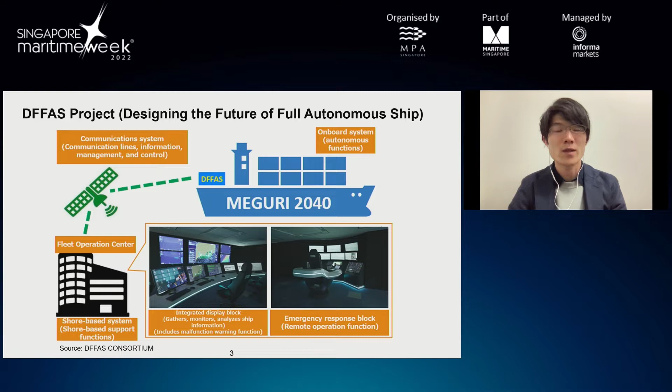This research conducted throughout the DFFAS project mainly has two objectives. First, to apply MBSE to autonomous navigation system development. Model-based systems engineering, MBSE, can consider overall requirements and functions based on the purpose and goal of the system and provide a common understanding of the system with multiple stakeholders. At the first stage of MBSE, the concept of operations, so-called CONOPS, is used to communicate overall system characteristics to the stakeholders. In this research, a reference model of CONOPS for a crewless autonomous navigation system is concretized using the DFFAS system as an example.

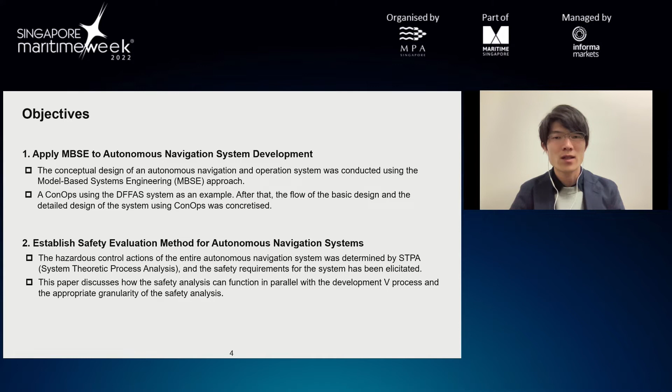The second is to establish a safety evaluation method for autonomous navigation systems. It is important to know how to deal with emergent hazardous events in designing complex systems using new technologies. The hazardous control actions of the entire system were determined by STPA, System Theoretic Process Analysis, and the safety requirements for the system have been determined. This paper discusses how safety analysis can function in parallel with the autonomous ship design process.

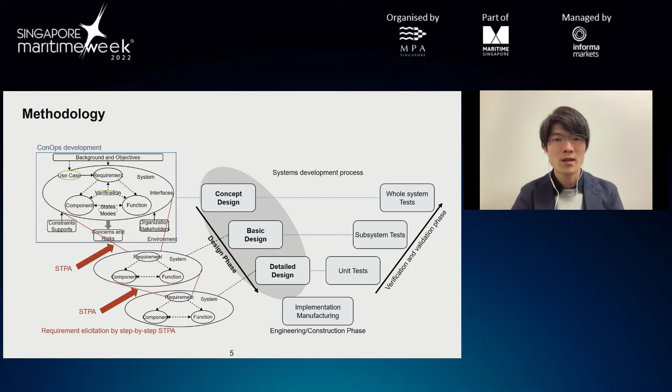This figure shows the holistic view of the focus of this research. The DFFAS project conducted the whole process of this V model by utilizing software-in-the-loop and hardware-in-the-loop tests. But in this paper, we focus on the design phase of the system development process, the left side of the V model. First, we develop a concept of operations reference model, and based on it, we demonstrate a safety requirements definition scheme by STPA for detailed design.

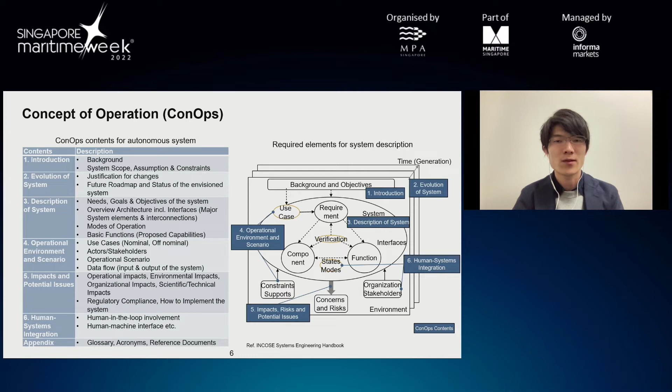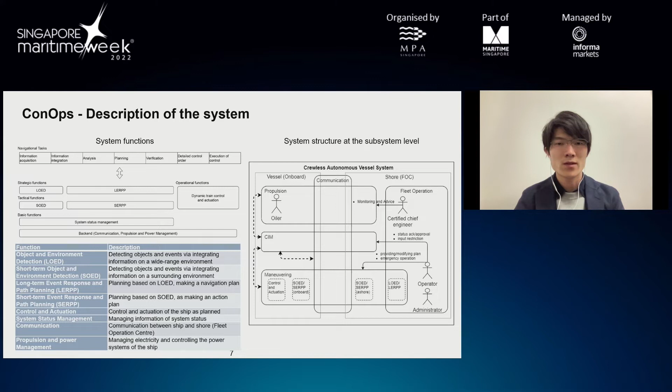The system structure to achieve these functions was defined at the subsystem level, as shown in the right figure. Each subsystem mostly corresponds to the basic functions. For example, the Central Information Management system, CIM, corresponds to the system status management function.

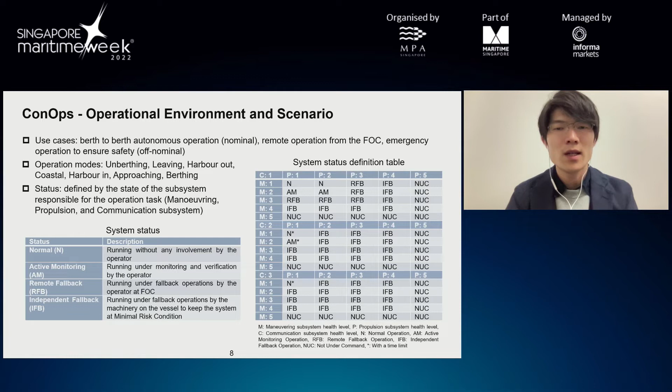After developing initial CONOPS, STPA is conducted, which can help us extract safety requirements for the design. As a first step of STPA, the accidents and hazards of the system and the safety constraints are defined. In general, safety constraints seem to be defined as close to the final consequences as possible.

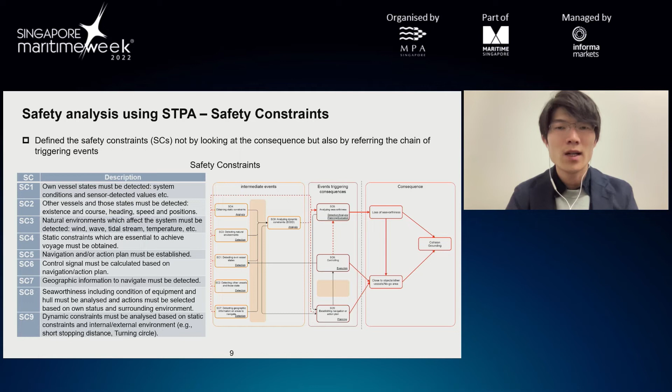However, in considering a complex system, it seems difficult to extract the unsafe control actions with abstract safety constraints, as some control actions can be too far from the consequences. Therefore, a chain of events has been assumed, and these intermediate events were defined as the safety constraints.

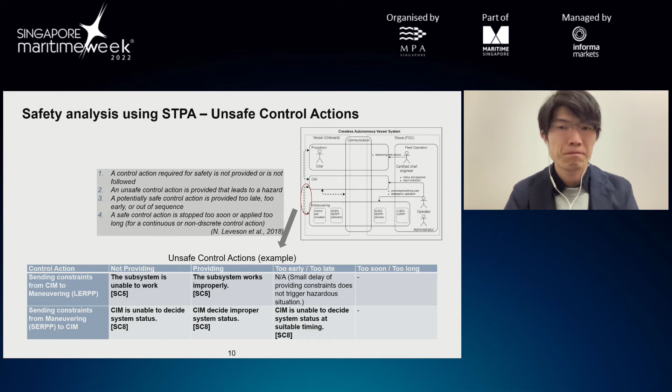After that, we extracted the unsafe control actions by checking the interfaces among the subsystems described in the control structure one by one. At the first stage, we use the system structure described in CONOPS. The 4 guiding sentences shown here are used as guiding sentences. Based on these, the unsafe control actions were extracted, and a couple of them are shown in the table below. The square brackets indicate the safety constraints that conflict.

As a final step of STPA, the hazard contribution factors were extracted for each UCA. The obtained UCAs and hazard contribution factors were organized in a bow-tie model to increase their visibility. The countermeasures against the hazard contribution factors function as the requirements for the subsystems.

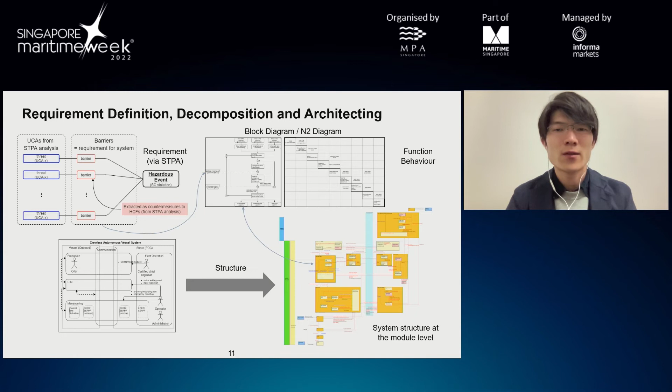Referring to the framework of SysML, we organized the model diagrams of the system and clarified the relationship among them based on the safety requirements from STPA. System configuration, including the modules and components in subsystems, was also detailed. In the real development process, STPAs were conducted at several levels of granularity to design the behavior and structure step by step.

Here is the summary of this research. We studied the appropriate CONOPS elements for the autonomous navigation system and designed a set of functions and subsystems, and a new type of subsystem concept is proposed to manage the system status. We established a method using STPA step by step according to the actual system development phase to extract appropriate safety requirements. We also proposed a set of safety constraints for the autonomous navigation system.

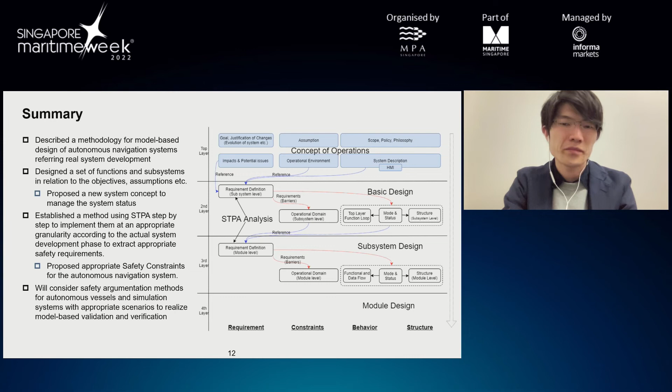As future work, we will consider safety argumentation methods for autonomous vessels and simulation systems with scenarios to realize model-based validation and verification. Thank you very much for your kind listening.